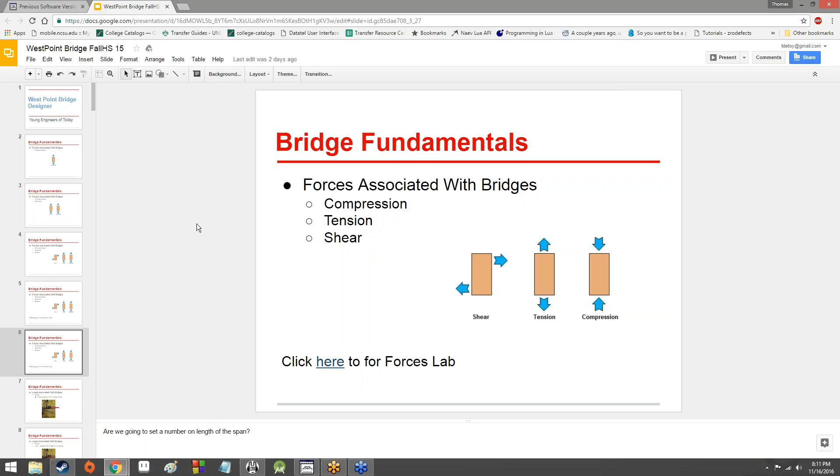You've got loads which generate those forces, like dead loads. You just click the link for download, so if I want the one for Windows, I just click the download link, and that should be it. It should take you to a SourceForge page, and it will automatically download after a certain period of time. But that should be all you have to do.

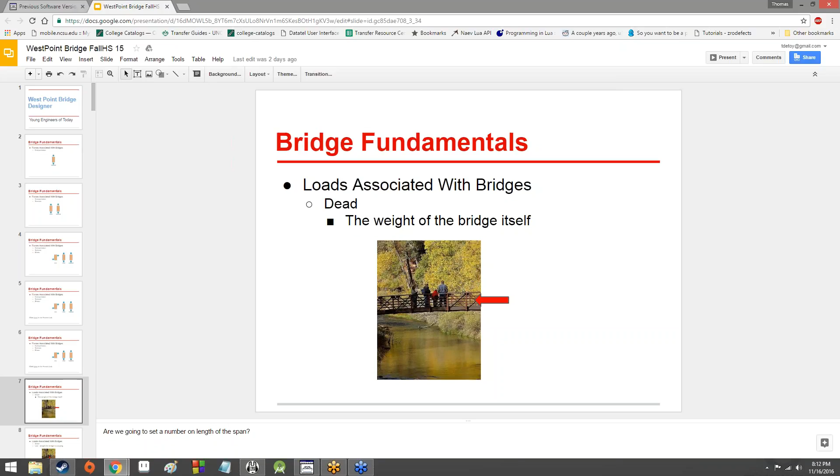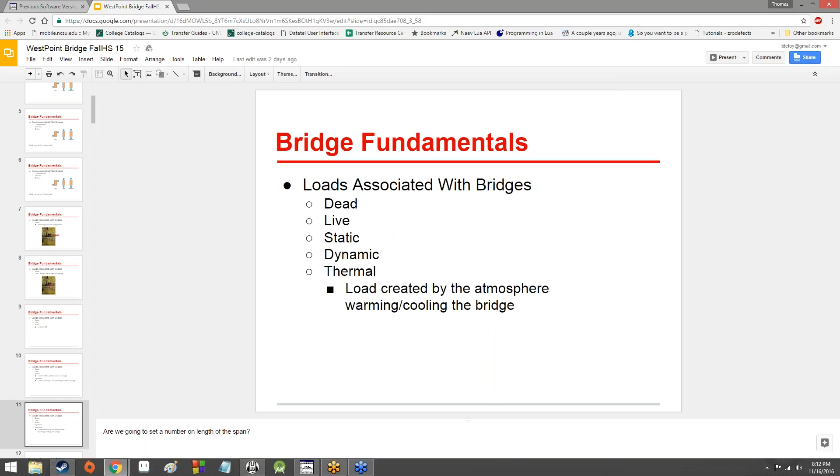Dead load is the weight of the bridge itself. Live load is the weight the bridge is carrying, which could be either still loads (static loads) or moving loads (dynamic loads). There are thermal loads, which are weather causing things to contract and expand by heating or cooling them. Earthquake is pretty straightforward: the earth shakes, bridge hurts. Wind, also pretty straightforward: wind blows, bridge hurts.

Yes, it does take you to SourceForge, at least for the 2015 version. You're fine, I just want to make sure we're all on the same page. All good though.

I apologize too, I'm fairly scatterbrained right now.

Anyway, these loads can generate those forces on a bridge. Pretty self-explanatory stuff: the weight of the bridge, the weight of the stuff on the bridge, as subcategories, stuff on the bridge that's moving or not moving, the stress caused by temperature changes, the stress caused by the earth shaking, and the stress caused by the wind blowing.

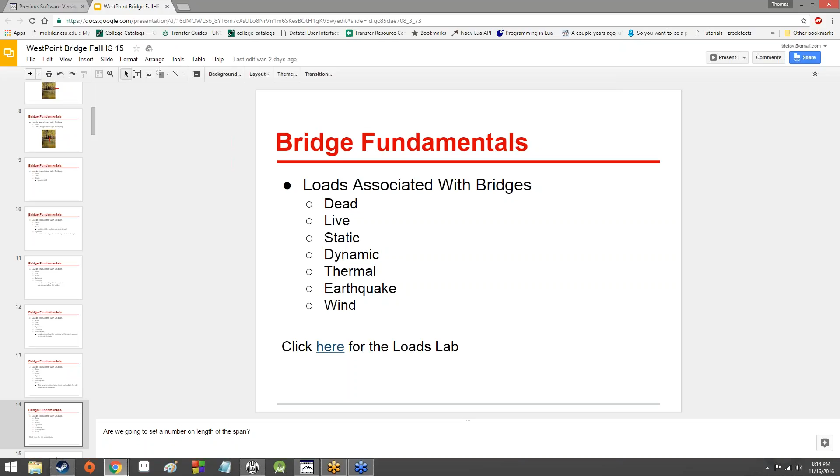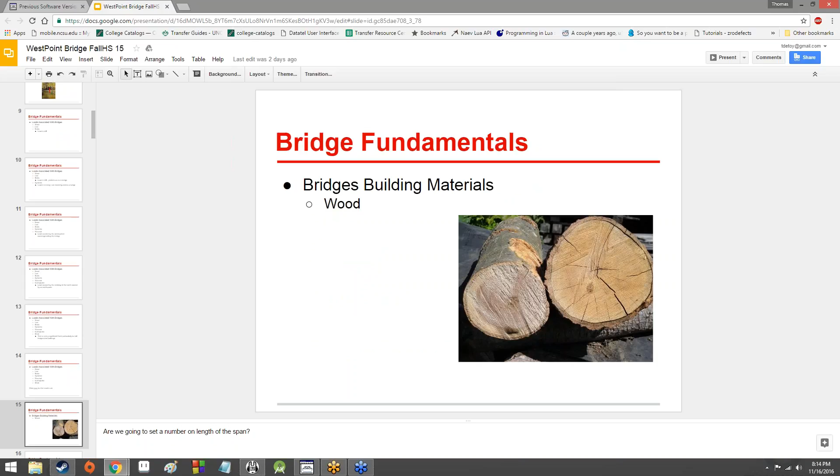There are different materials you can build a bridge out of to combat these things. You've got wood, which is good and cheap, but you have to replace it. It can also catch fire.

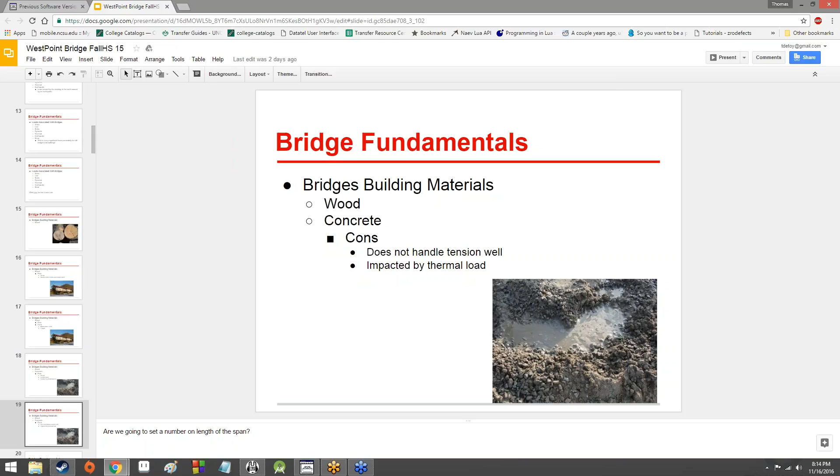Concrete, which is good and cheap, handles compression pretty well. It's fireproof. However, it doesn't really handle tension well and is affected by temperature changes, not specifically fire, but just temperature changes.

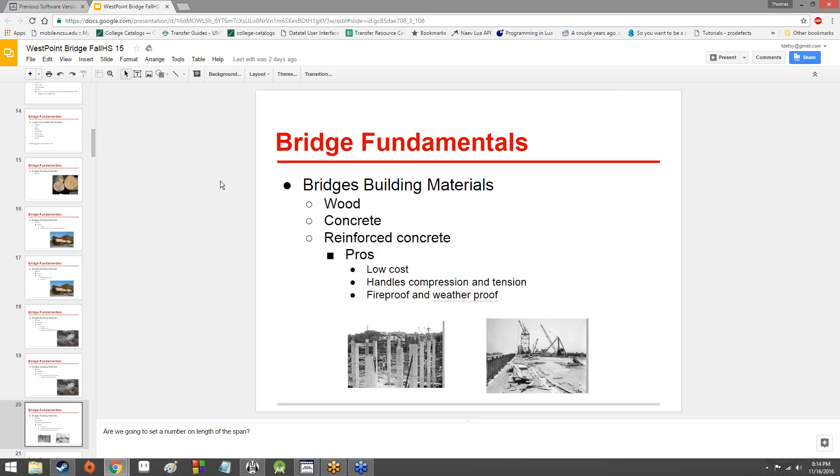Reinforced concrete is good, and it solves the tension issue of regular concrete. It's low cost, and additionally fireproof and weatherproof. However, it still has issues with temperature changes.

And then cast iron, which is strong. You can form it in any shape. It's fireproof, but it is expensive and it doesn't really handle tension well, and there's no real warning before it breaks. And then steel, which does a fantastic job of holding up. It's very resilient, very strong, but it's expensive.

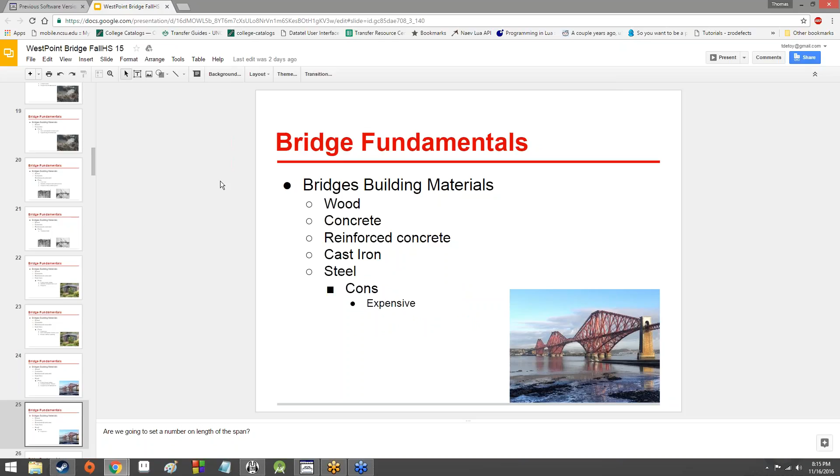The shape of the bridge also affects how well it holds loads. Rectangular bridges are not that great, but arch bridges are like a brick and mortar or stone and mortar sort of thing. Those would also generally be fireproof and also very cheap.

However, they require a decent amount of maintenance, just like wood. Maybe not necessarily to that degree, but more so than steel or reinforced concrete. And they're certainly subject to things like weather and erosion, perhaps not to the extent that wood is, but still. Also, it can be difficult to build with.

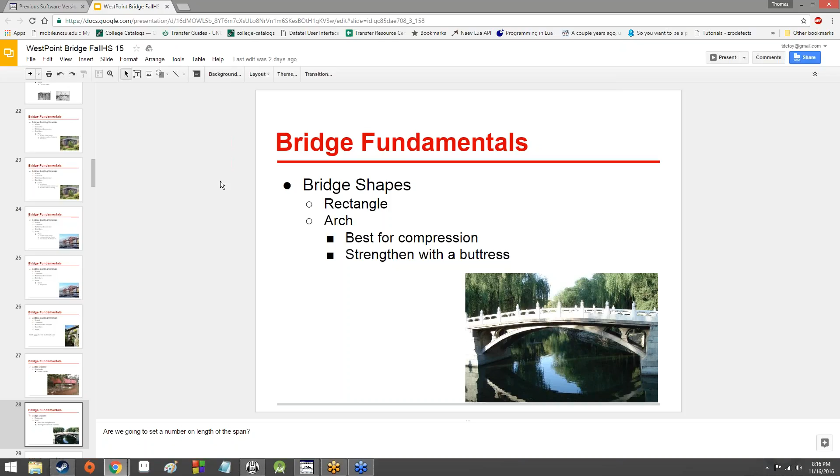So, rectangle: not so great. Arches: better than rectangles, good for compression. Triangles: sort of all around, better with tension than arches, but not quite as good at compression, and strongest at the points. So, a very versatile shape. Triangles are the most versatile of shapes.

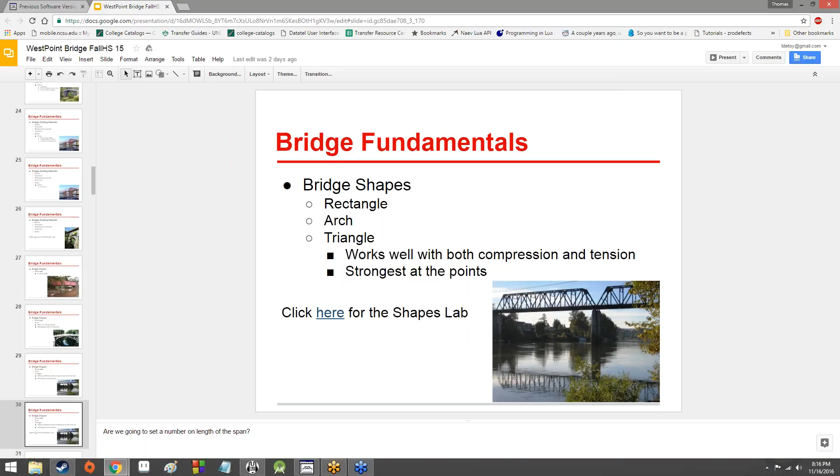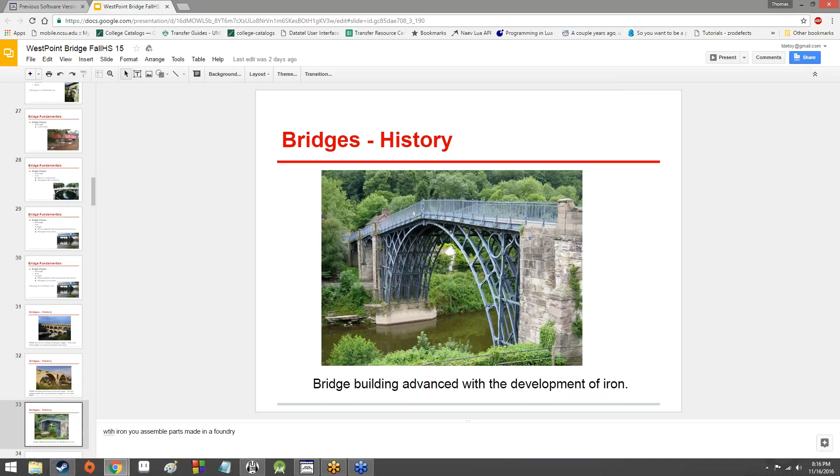Anyway, we went a little bit over the history: Rome, and how Rome was sort of the big deal on the scene, and then they weren't anymore. For a long time, nothing happened. Then iron happened, and that allowed for suspension bridges, which gave rise to the Brooklyn Bridge and the Golden Gate and a whole bunch of other bridges.

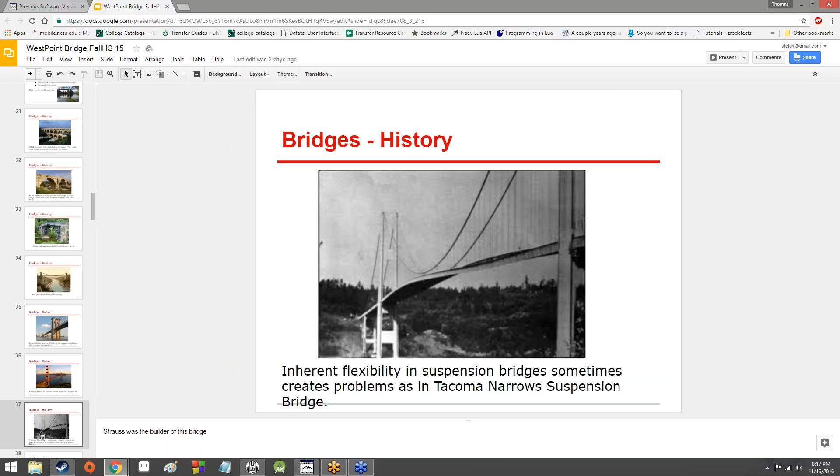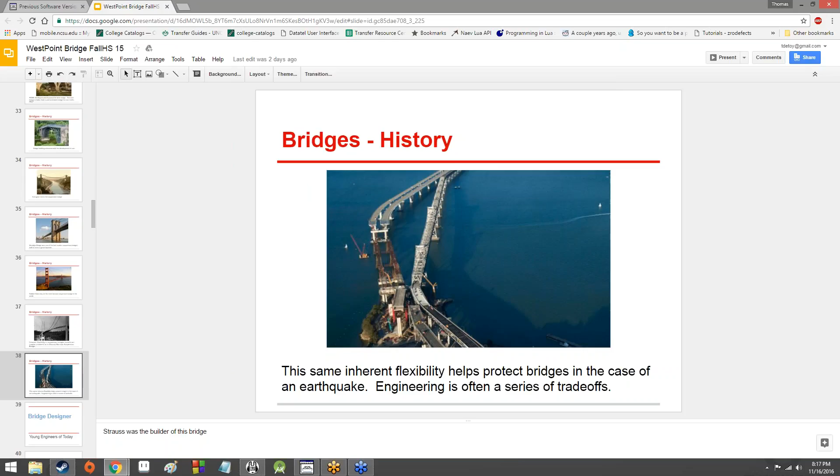Sometimes flexibility in suspension bridges can be a problem, like the Tacoma Narrows Bridge. However, it can be really helpful during an earthquake, like the Bay Bridge over here, which was a bad place to be during earthquakes in 1987, I believe, 1988. Yeah, not that fantastic.

Anyway, now the actual bridge designer software itself. What about this? What's the why? Why would we do this? Why would we use this? How do you use this? What's it good for?

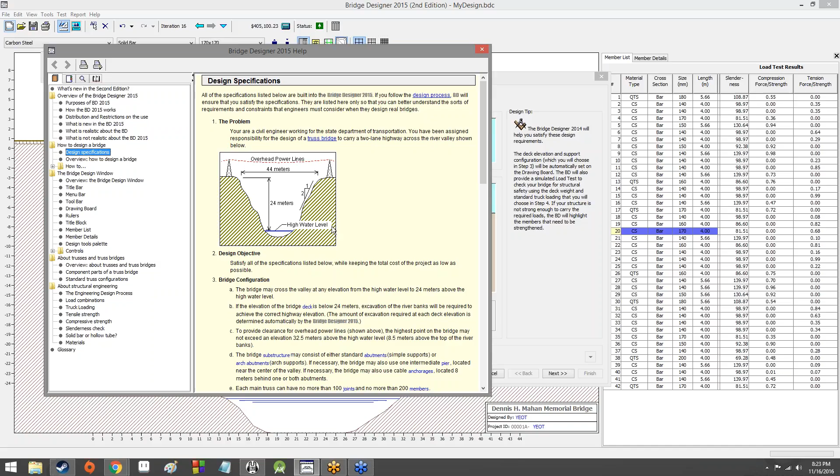The water level is decently high. The bridge may cross the valley at any elevation from the high water level to 24 meters above the high water level. If the elevation of the bridge deck is below 24 meters, excavation of the riverbanks will be required to achieve the correct highway elevation.

Oh, you found your old bridge? Nice.

Provide clearance for the overhead power lines. The highest point on the bridge may not exceed an elevation of 32.5 meters above the high water level, 8.5 meters above the top of the riverbanks.

And the bridge substructure may consist of either standard abutments or arch abutments. If necessary, the bridge may also use one intermediate pier located near the center of the valley. If necessary, the bridge may also use cable anchorages located 8 meters behind one or both abutments.

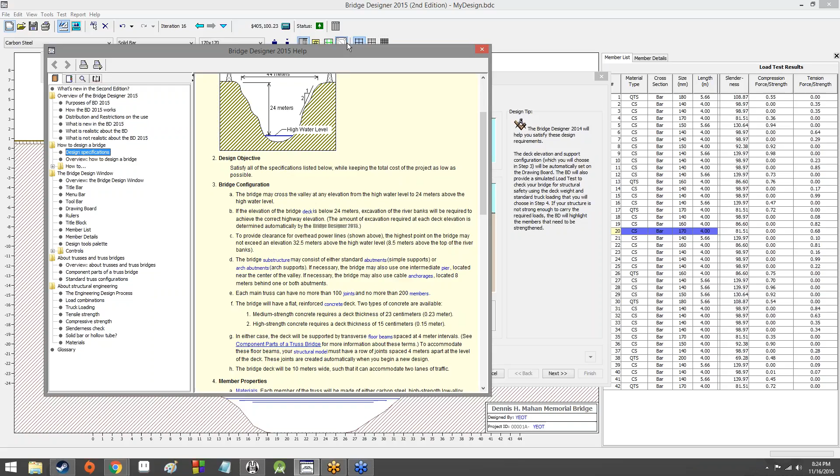Each main truss can have no more than 100 joints and no more than 200 members. So this is just all fairly basic stuff, like you can't have more things than the stuff that we say you can have, for reasons.

The bridge will have a flat reinforced concrete deck. There are two types available, which we'll see in a minute.

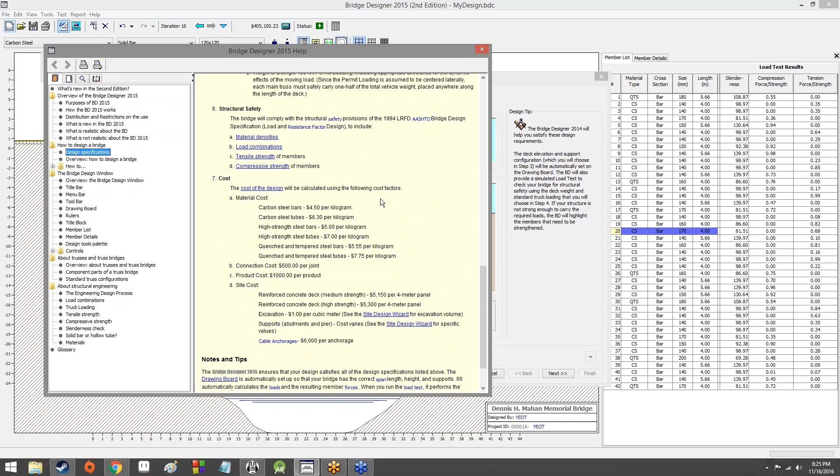Costs are calculated. Anyway, that's a whole lot of stuff. It actually kind of walks you through a lot of the stuff as you get this set up.

So I'm going to go ahead and click Next. I've read the design requirements. Bam, enter local contest information.

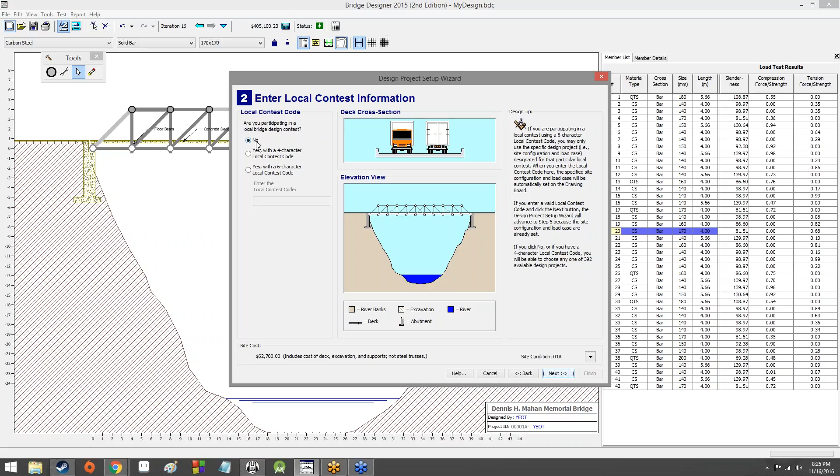Yours will probably have a blank deck cross-section and a blank elevation view. Mine is there because I set up a bridge already. Just so we're all clear, no, we are not entering a local bridge design contest, despite the fact that we're having a Young Engineers competition. There's no contest code for that or anything like that, you don't have to worry about that kind of stuff. So no, you are not participating in a local bridge design contest.

Click Next. Here we can change stuff that will be affected in the elevation view, so the deck elevation, the support configuration, and everything related to that. Now keep note of the site cost—there's already a site cost of $62,700.

Already, without even changing anything, our bridge already costs $62,000. I don't know about you, but that's pretty expensive. I mean, in the grand scheme of things, meh. Like this bridge I built for the middle school class is $405,000. I'm sure you could make one that's cheaper. But...

I'm just thinking $62,000. I wish I had that amount of money. Anyway...

Deck elevation. Changing this also changes the span, because as we move the elevation down, they excavate out some of the valley and put the bridge there. So if we move it down more, look at that. Now the span is shorter. The span is shorter, and the span is shortest.

Also keep in mind that this does increase the cost before we've even started building the bridge, because they have to pay for the excavation. If you click the little triangle down here, you can expand it to see how everything's changed. So excavation costs $102,000 — that's a lot of money. So let me go ahead and bring it back up to maximum height. And as you can see, excavation costs are now 0, but the deck cost is increased.

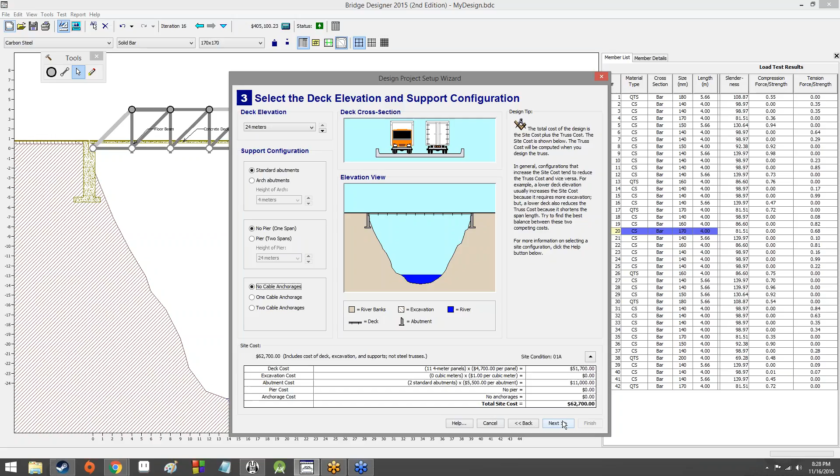Anyway, you can also add cable anchorages for a suspension bridge. But again, those do cost money, not too much though — $6,000 a piece. That's not terrible. Anyway, I'm gonna keep everything default and click next.

Now we're given the deck material and the truck loading. The deck material is the material that the deck is made out of. By default it's medium strength concrete, which is thicker and heavier. You can also have high strength concrete, which is thinner and lighter. However, it is more expensive, by a pretty small margin, but a margin nonetheless.

51,700 for the deck versus 56,100 for the deck, so a little bit under $5,000. You can see the cost update reflected here, 62,700 to 67,100.

The way that it's loaded just has to do with how the bridge is tested. We'll just use the standard 225 kilonewton trucks.

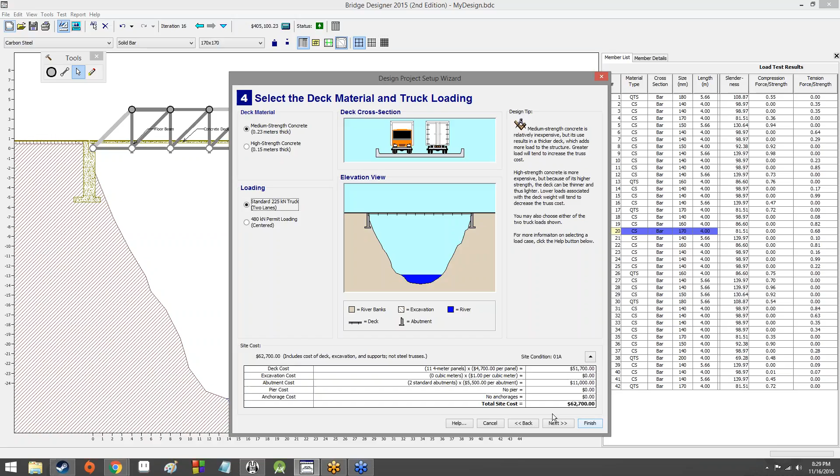Click next. Then we're given a truss template. You don't need a truss template. However, it can be good to provide a sort of starting point, a setup point. So we can have a Howe truss, Pratt truss, Warren truss, or the same versions but underneath the deck.

Now, your truss template list will be different probably if you selected different setups for the bridge from me. If you selected a suspension bridge setup by putting down cable anchorages, you're going to have different truss templates than I will. That's okay — that's just because those are the ones applicable to that specific concept you have going.

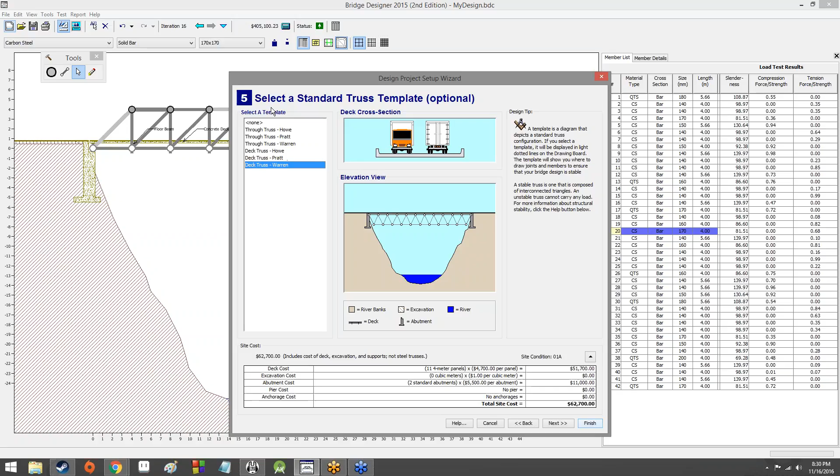So I'm going to select the through truss. I'm going to click next.

The project name is Dennis H. Mahan Memorial Bridge — we can't really change that. Designed by and project ID: designed by, obviously, you can put your name in there. I just put Young Engineers of Today. And project ID, Young Engineers of Today, whatever, doesn't really matter. But that's what I put down for that kind of stuff. You just give yourself a name for the project and give the project a name. And then click next.

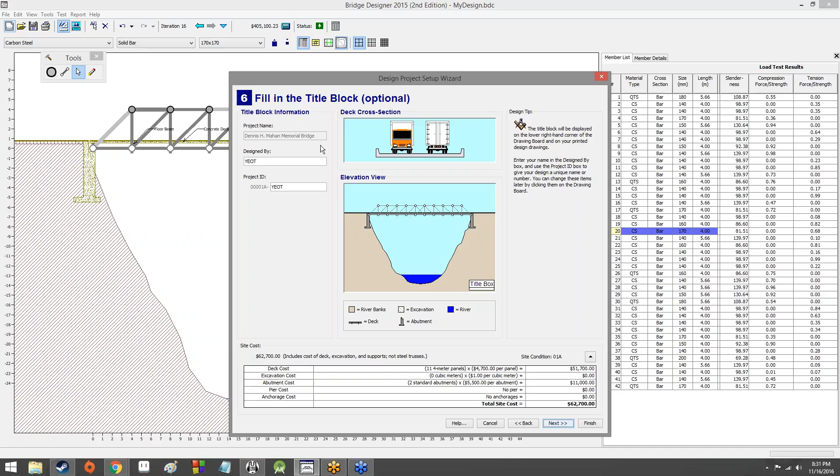Finally, we're given this. This is just sort of a step-by-step process of how we're going to design the truss and finally the final product for the bridge. So: design the truss. 1, click the Finish button to activate the drawing board. 2, click the joints. 3, draw the members. 4, run the load test to determine the strength of your design. 5, strengthen any members that fail during the load test. 6, optimize the design by minimizing its cost.

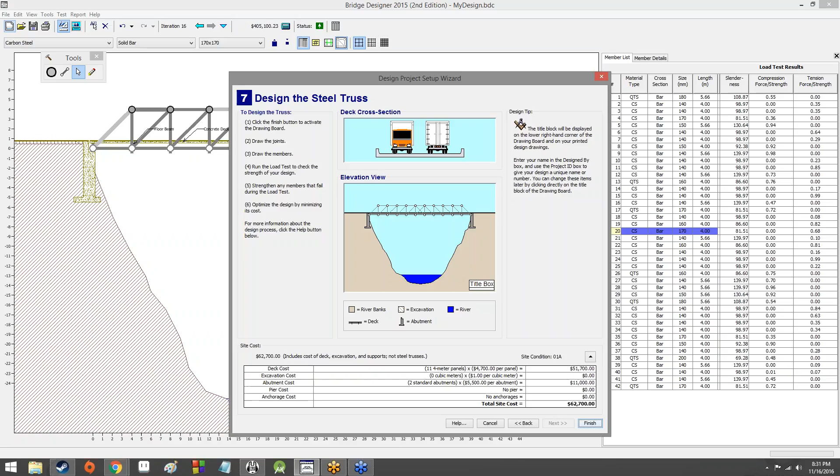That's the engineering process in a nutshell. So let me just go ahead and click Finish. And after 10 minutes of explanation, sorry about that, we're here. This is what we're looking at. Not really all that exciting, not really as graphically intense as maybe you were anticipating, and I'm sorry if that's disappointing. But this is how a lot of engineering software is going to look in many ways.

Without the cool simulation aspect of it.

So, important things to note. We've got these gray circles here, we've got these lines here, we've got this thicker gray line with these gray circles in here, or I guess they're white circles. And then we've got this floating window of tools.

The tools window contains pretty much everything we need in order to draw a bridge. In order to get into the more nitty-gritty of the stuff, that'll come later. There are some other things that we need, but we'll explore those as we get to them.

There are a few things on the tools list, though, that I want to take a look at. There is this gray circle—if you mouse over it, it says select the joint tool. There is a gray bar with 2 gray circles—mouse over it, select the member tool. There is another cursor—mouse over it, select joints and members, and then there's an eraser.

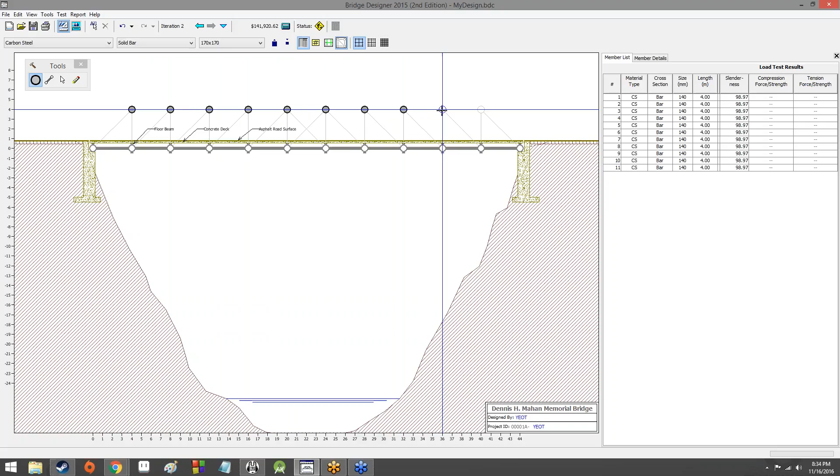I'm going to draw joints on each of these gray circles, white circles, whatever they are, along the top. I'm not going to touch the ones on the bottom. The reason being, this thicker gray line represents the deck, and the deck already has some joints built in.

So we can't actually put joints here. See, if I try to click on it, nothing happens. I can put joints next to it, but I don't really want to do that right now because the joints cost $1,000 a piece. So right there, we've already got cost being added into our bridge.

So now I've drawn all the joints that I really kind of need in order to get started on this bridge design. I'm going to go over to the member tool, and I'm going to start drawing the bars to connect everything. And it's literally just that.

See, if I mouse over a joint with the pencil tool, I can click and drag to another joint, and that gets highlighted, and I get a little blue dotted line, and boom, I let go, I've drawn a member. You just want to draw over each of these gray lines.

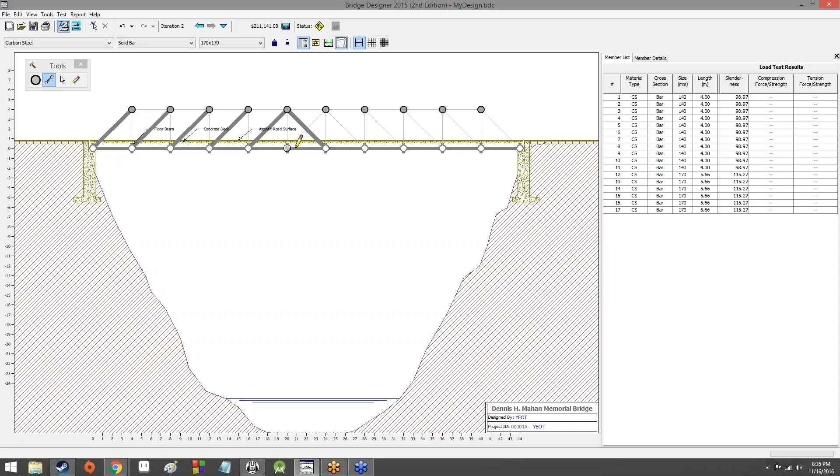And as you can see, if you're paying attention to the right-hand side of the screen as I'm doing this, there are more items appearing in the member list, for obvious reasons, because we're drawing new members.

The member list lists all of the members that are a part of the bridge. It also gives you some additional supplementary information that is useful at a glance.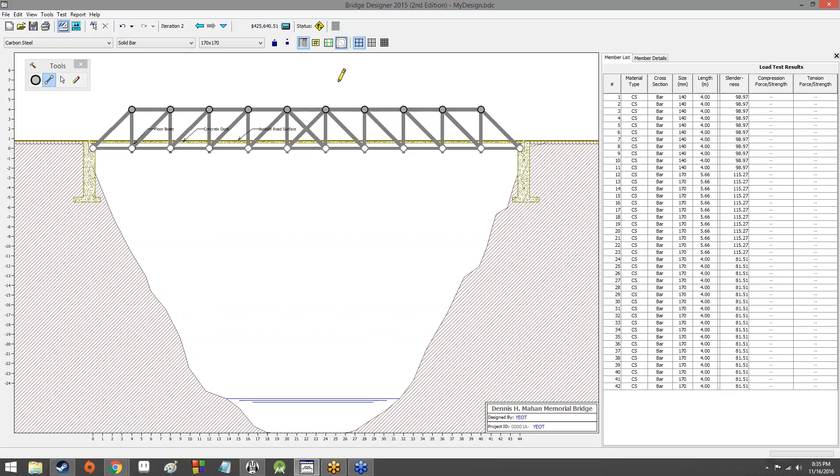So let me go ahead and finish drawing this. Done. We've covered over all of the thin gray lines with thicker gray lines. And now let's talk about what exactly is going on over here in the member list.

Now the member list contains information, like I said, at a glance about all of the different members that exist on this bridge. You've got numbers, and we can click on them and select that particular member, so like member 1 down here, that sort of thing. We've got material type, cross-section, size, length, slenderness, compression force to strength ratio, and tension force to strength ratio.

Material type is the material it's made out of—in this case, carbon steel, that's what CS is short for. Cross-section is a description of the cross-section of the bar—so if you were just to chop it in half, what would the cross-section look like? In this case, it's a solid bar.

Length is the length of the member in meters. So that is from one joint to another, not the thickness of it.

Slenderness is the ratio of length to size. The higher the slenderness, the more slender the member is.

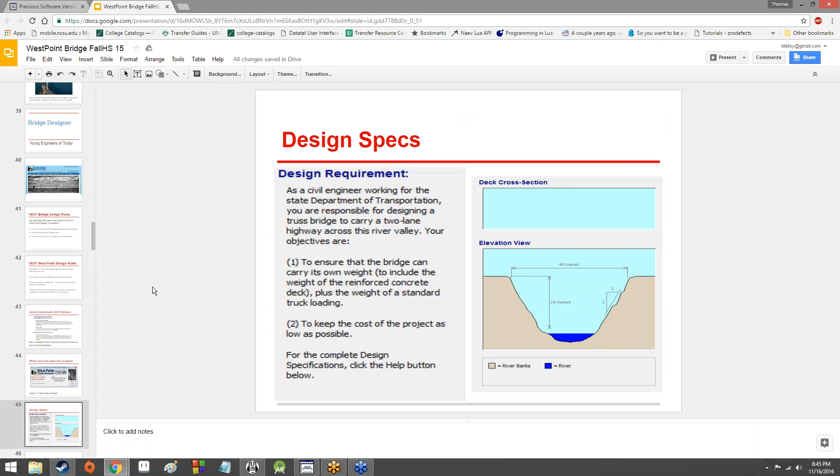So let's actually go back to the slideshow for a minute here, and we'll take a look at what they've got, because there's a very specific set of steps we can go through to make this thing work just wonderfully.

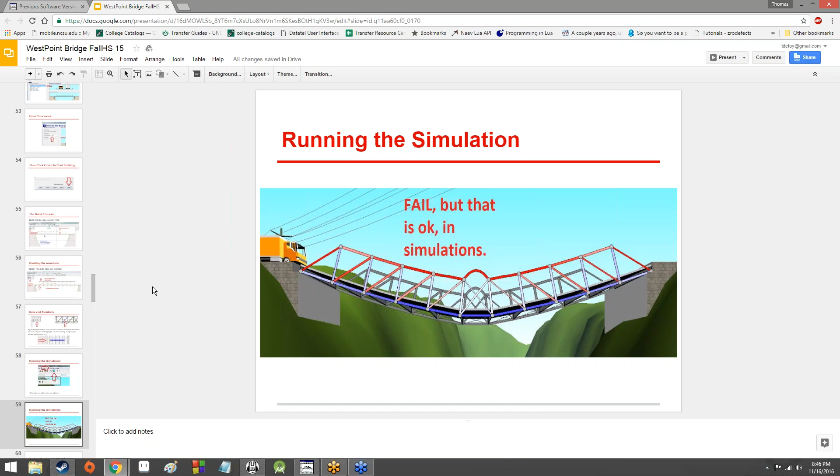Oh yeah, that's also important to note — as you guys probably already figured out, the ones that are highlighted red or blue also get highlighted with red hashes or blue hashes on the actual design picture itself. So there you go.

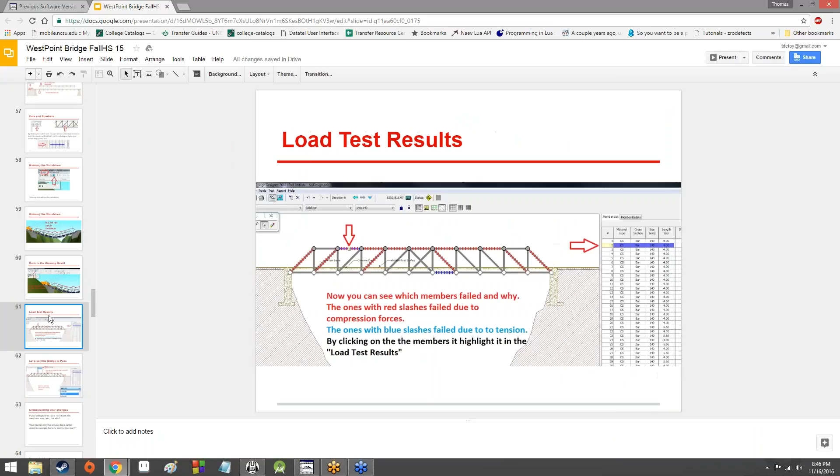So first things first, if I select one of these members on the sides, I get some information here. I see obviously that it failed due to compression forces, but I can also see that it failed pretty significantly — it experienced about 1.5 times the amount of force required for it to fail.

In fact, this one was pretty dramatic. In the middle right here, it experienced almost 2 times the amount of force needed to make it fail, which is why it bent like that. But let's address these ones on the sides real quick.

Now, in order to make this stronger, we've got a few different things available to us. We can change the material it's made out of, or we can change the cross-section. We can also change the length, but let's just assume for the sake of argument that we're keeping the length the same on everything — although that's always something to explore in the future, maybe adding another node or making shorter lengths that are potentially stronger.

At any rate, how do we go about doing that? Well, if we look at the top right here, we see we've got 3 drop-down menus: one labeled carbon steel, one labeled solid bar, and one labeled 140 by 140.

What we're going to do is change it to 150 by 150. As you can see, our entire load test result just went out the window because it's no longer valid. We just changed two things, and that changes everything.

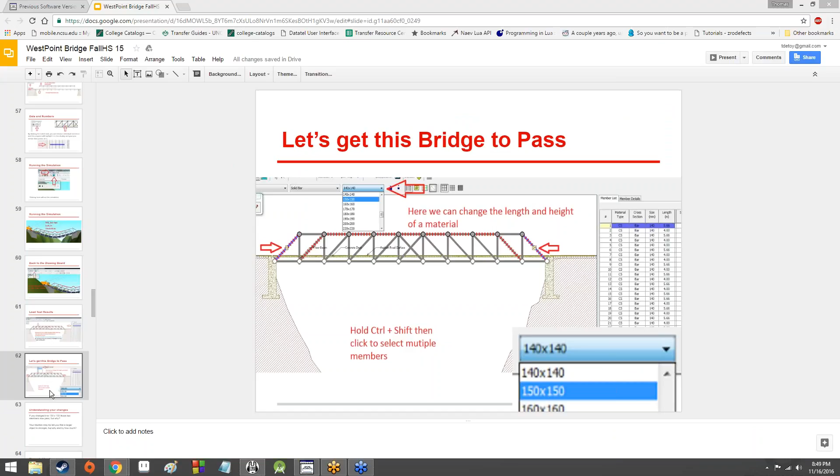We want that. We definitely want the compression force to strength ratio to be lower. Intuitively, we can kind of guess that yes, it will be lower, but realize that these members still don't pass. I believe Bridge Designer 2013 is much more forgiving than Bridge Designer 2015.

So the moment of inertia, which is that thing I was talking about in the member details, is a quantity expressing a body's tendency to resist change. It's similar to, but not to be confused with, inertia, which is a property of matter by which it continues in its existing state of rest or uniform motion in a straight line unless that state is changed by an external force.

Basically, the moment of inertia is like how hard it is to change the direction of a ball, versus inertia, which is the ball's ability to continue going the same direction. That's sort of an okay descriptor of how those two are distinguished from one another. Congratulations, Cohen.

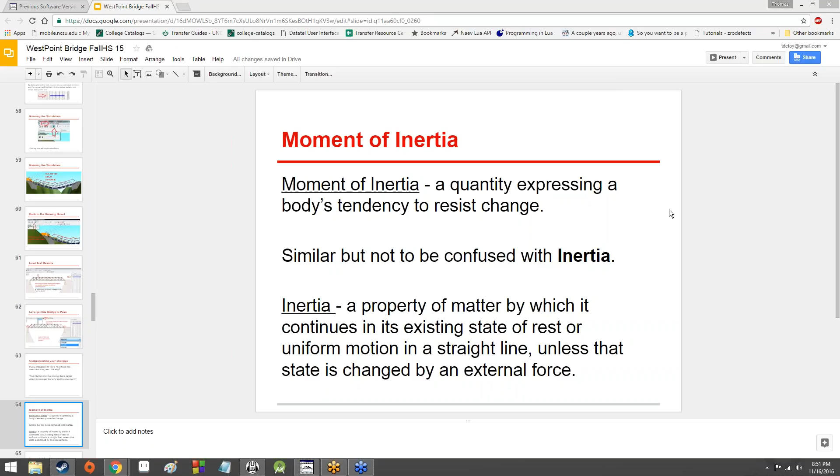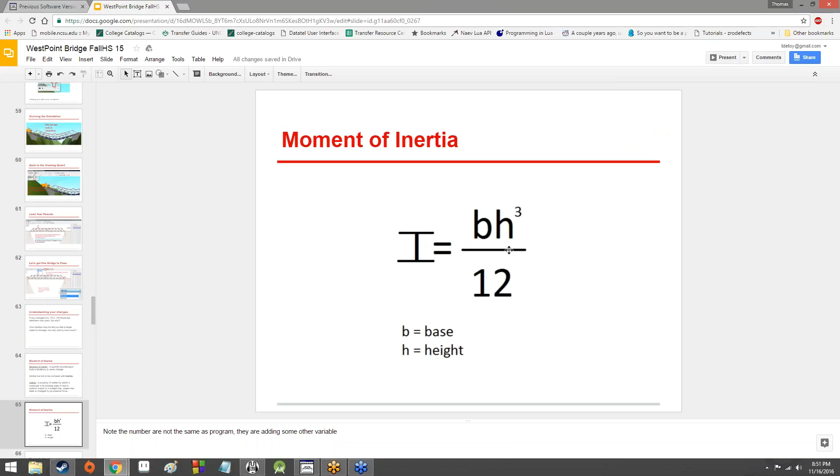The moment of inertia is expressed in this formula, which is super exciting, I know. Basically, base times height cubed divided by 12. Base times height being the cross-section. If we make the cross-section thicker, this becomes much larger. So does moment of inertia, so it becomes much stronger, as you can see.

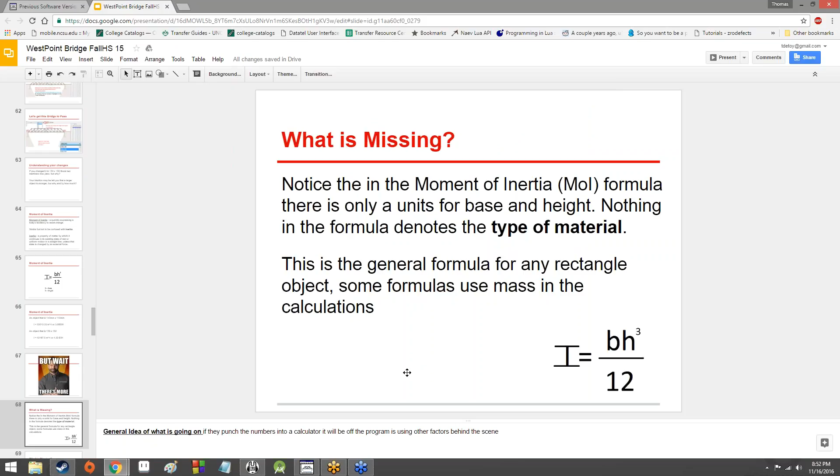This is also a good point. In the moment of inertia formula, there are only units for base and height. Nothing in the formula talks about the type of material. If you were just to type this into a calculator, you'd get numbers way different than the moment of inertia listed here. The moment of inertia listed here also takes into account the strength of the material, which is another thing that can be utilized and accounted for.

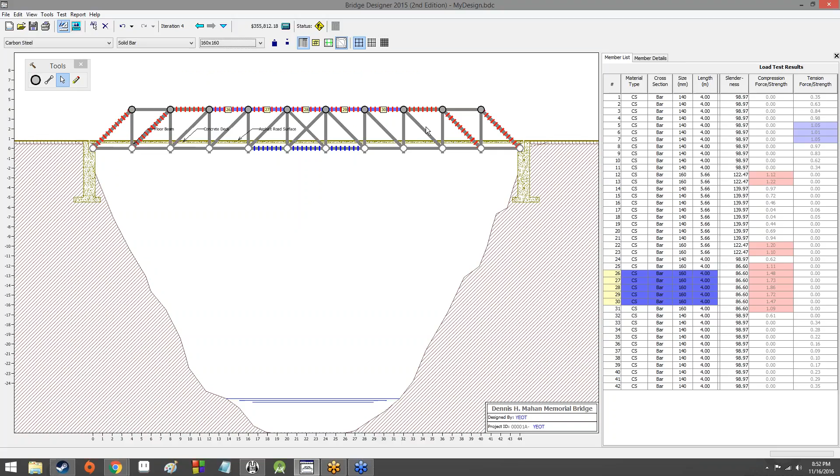But anyway, let's make these both a little thicker. In fact, let's select all of these and make all of these 160 by 160. I can select multiple ones by holding down Control and clicking, or by dragging a box around them. Anyway, go to Simulation, and look at that.

The truck is willing to try it, and it failed. But hey, we made improvements. Now, as you can see, the failures are pretty much restricted to the middle of the bridge, and the failure values are much, much lower.

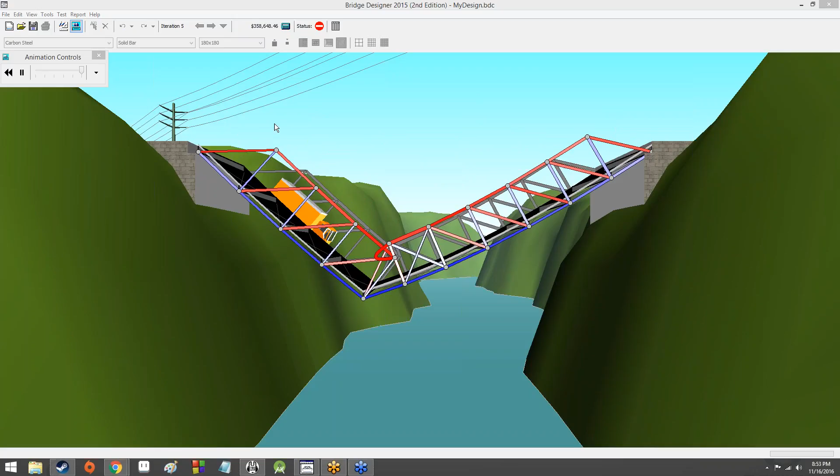So if we change this to 180 by 180, as you can see, it does a little bit better of a job holding up. As the truck goes, bam, that side fails pretty spectacularly. Things are bad, but that's okay. At first you don't succeed - build a better bridge.

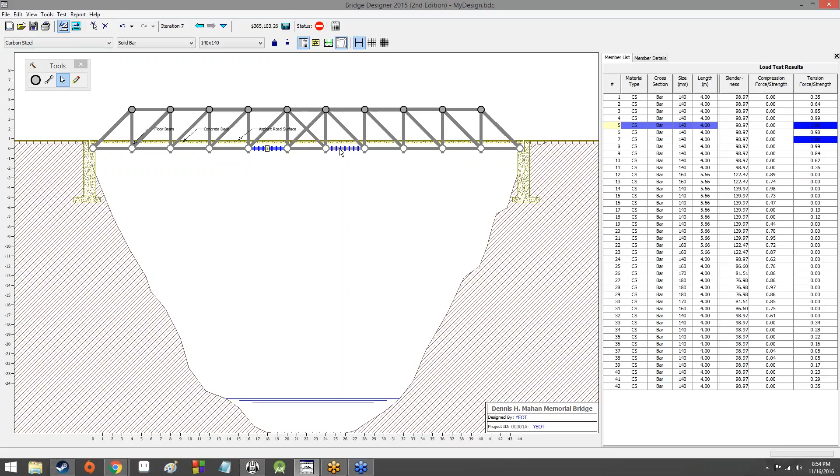Not quite. Make those 180 by 180. And that part failed - those two failed. So if we make those thicker, they should do a much better job of withstanding. And just barely, the truck makes it across. Magical.

We'll spend a little bit of time going over the other concepts behind the scenes on this on Monday, and we'll spend a little more time with Bridge Designer in general. But otherwise, that's going to do it for today.